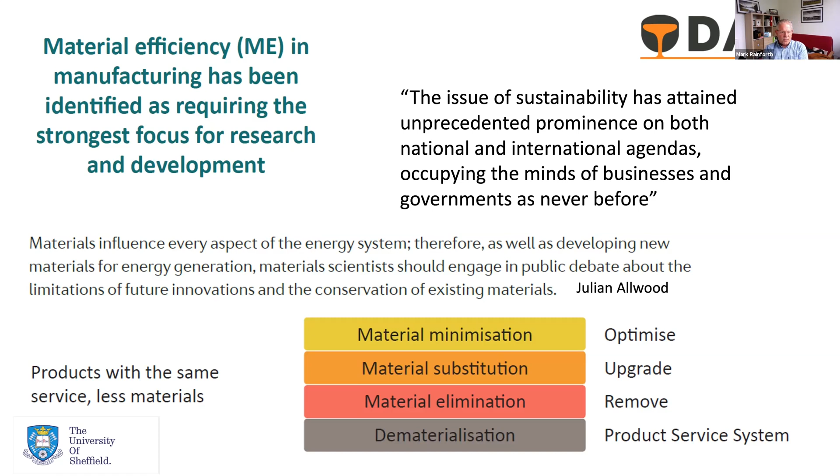And as Julian Allwood stated, materials influence every aspect of the energy system. Therefore, as well as developing new materials for energy generation, we must engage in public debate about limitations of future innovations and conservation of existing materials. So all very good words. And of course, it applies across a very wide range of different sectors, whether it's aerospace, transport, energy generation, etc. It's pretty much a universal issue.

So as Cameron introduced, we will run out of elements. There are many different ways of presenting this data, and some, like aluminium, we have reserves to take us forward a very long time into the future, but others certainly are much more restricted.

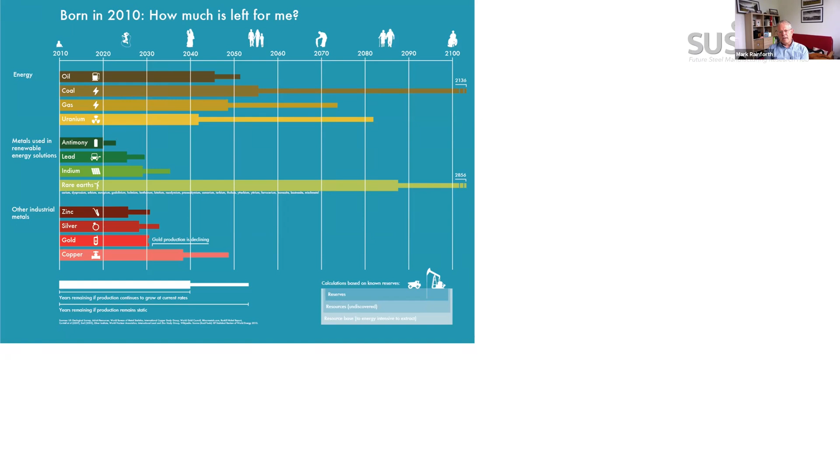But of course, it's not just the issue of how much resource we have. So rare earths have a very long resource availability, but of course that is affected by the location they come from.

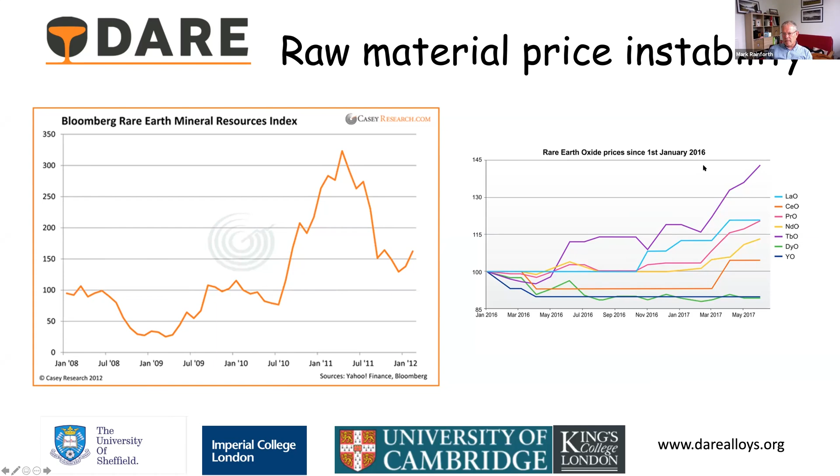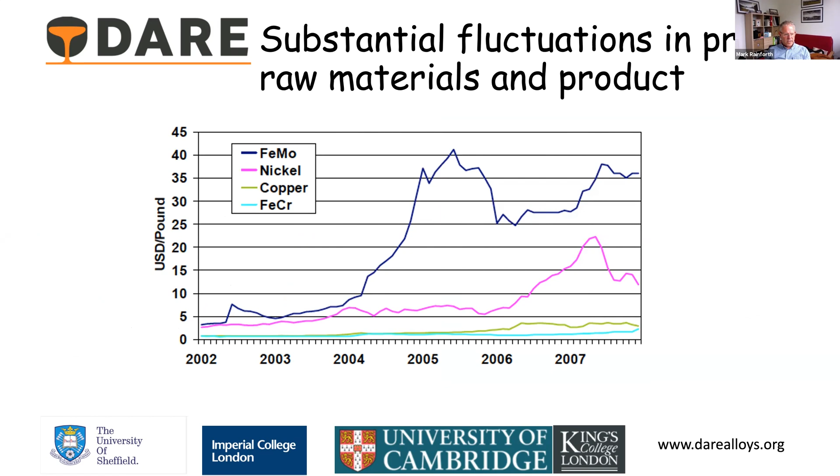Even when looking at the price of raw materials within supply, for example into the steel industry, we can see the price of ferromolybdenum has gone up very significantly since 2002, where on that scale it's gone from around 3 up to around 40. But it's very volatile.

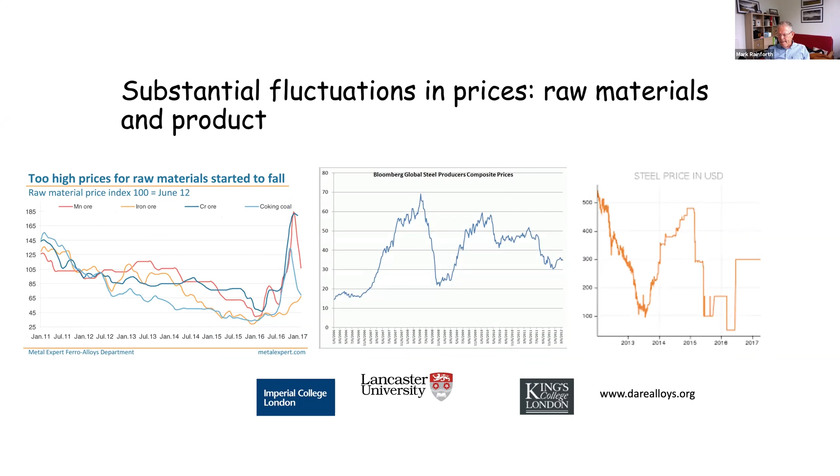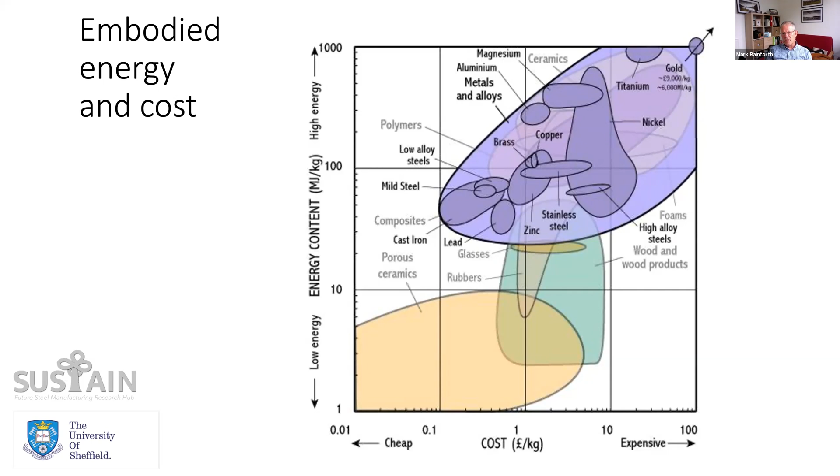So that's just relevant to the steel industry, but it's a similar message across the board. Price fluctuation is a serious issue for us, as well as our limited resource. And that's before we even get to the amount of energy embodied within the materials, and of course the CO2 emissions that come from producing this material. So I won't dwell on that, but it's all pretty scary stuff.

So what I want to do with the talk is go through some specific examples of where we have used this approach to try and reduce the reliance on scarce resource. One has to do these things bearing in mind that when we're going to do this for any particular industrial sector, it usually has to be done at the same price, if not reduced price. So you are looking for improved product performance at the same price or reduced price.

So I'm going to start talking about steel, and we know how much, in this audience, steel underpins UK manufacturing. There's many that don't understand how much steel influences our everyday life, whether it's construction, transport, or just engineered goods, and certainly within the energy sectors.

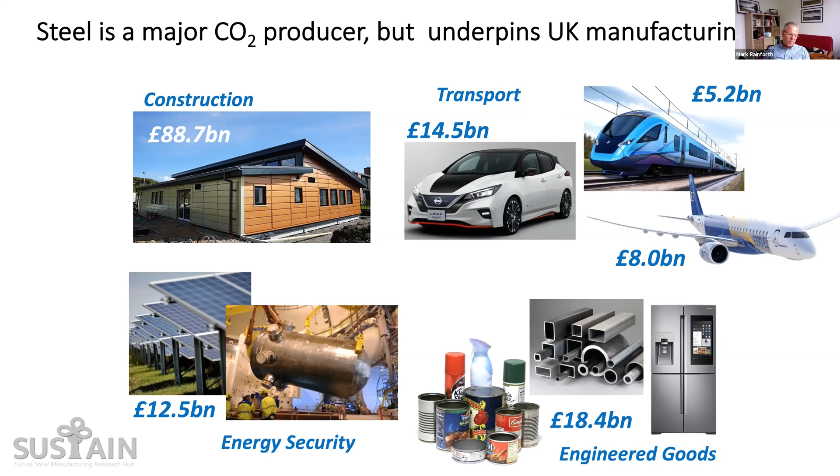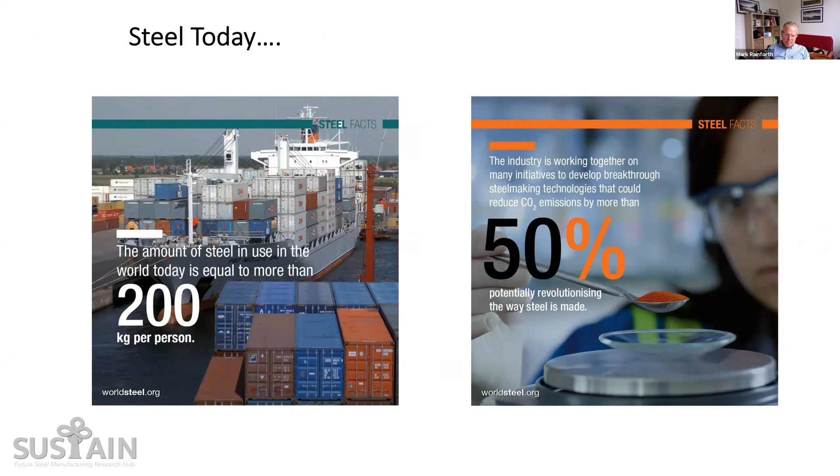And just some statistics, which you may well have heard. I could pluck out many of these, but the amount of steel in use for the world today is equal to more than 200 kilograms per person, which is huge across the whole world. There are many statistics I could give on the importance of steel.

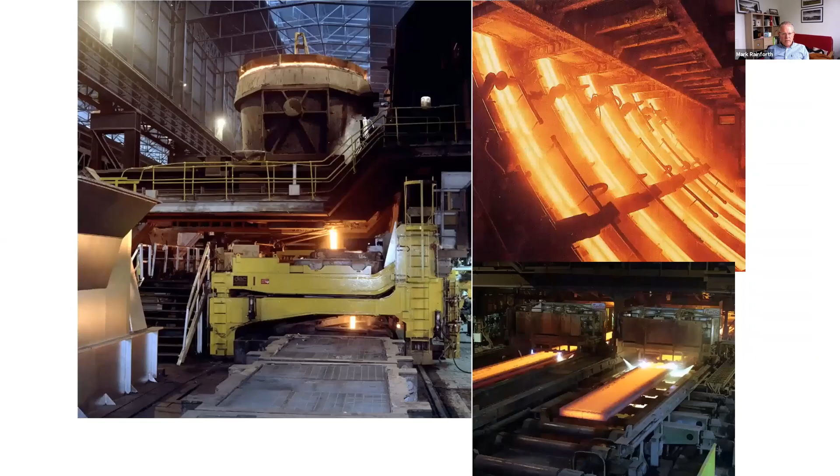I started my career—Cameron said that I went into industry. I started in the steel industry in the Sheffield Rotherham area. This was one of the first continuous casters put in at Templeborough. Very exciting place to work in those days. Of course, now this is what it is today—it's now just a museum and a children's play area, and how things have changed over that period.

So I want to start going through some examples where we have used our approach to designing new alloys, which hopefully in some way adds to this resource efficiency.

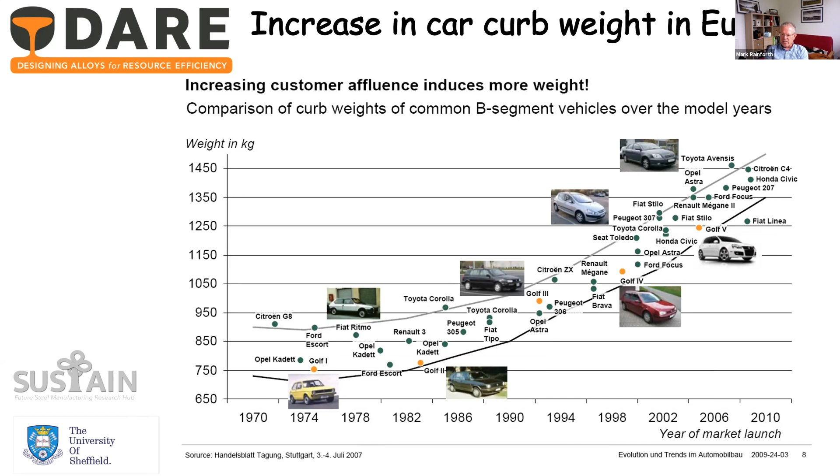So looking first at transport, we all know that the curb weight of cars has gone up substantially. We always like to show this graph. If you look at when I learned to drive, quite a long time ago, the curb weight was typically around 800 kilograms in the late 70s, and now it's pretty much around double that. As more gadgets have been added, you need a motor for everything—to open your boot, wind your windows up, air conditioning, etc. So the curb weight has gone up substantially.

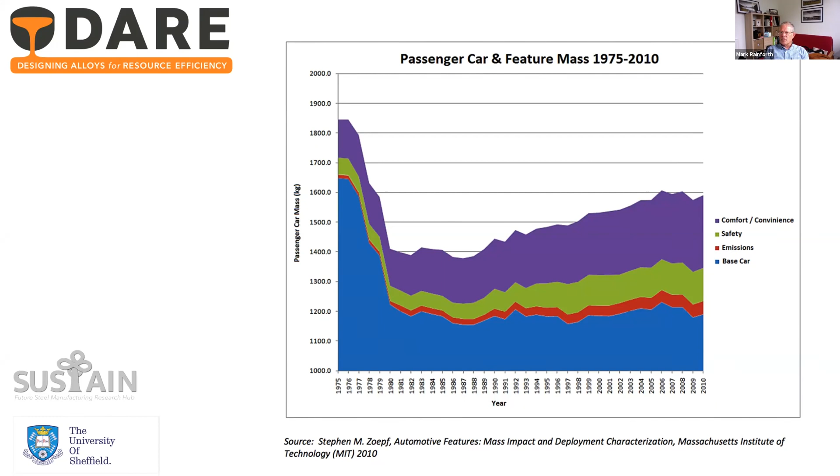This shows it in a slightly different way. We've got the car mass here, and then the contributors to the car's mass, whether it's comfort or convenience, which in purple is the largest one. Safety has been important, and cars are very much safer than they used to be. The base weight has remained roughly constant, which tells us a story, because cars are larger than they used to be, and the base weight has stayed much the same, meaning lighter use of steel. So that illustrates it.

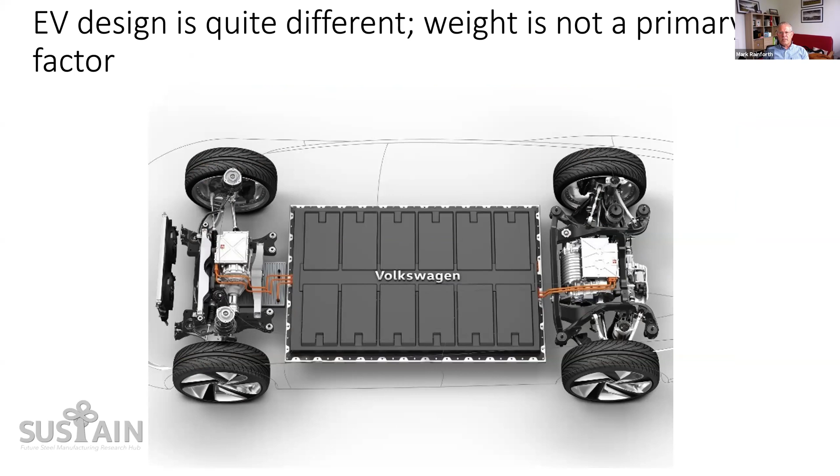Of course, as we move away from internal combustion towards EV and so on, weight issues are different. Weight is not necessarily the primary driver in automotive, but nevertheless it still becomes very important. So there's been a very big drive over the last 15 years or more to develop new advanced high-strength steels. This is a classic banana diagram where we plot the tensile strength of the material against its elongation—just one of the measures we could use for steel performance. But typically, as the strength goes up, the ductility of the material goes down. It's fairly inevitable.

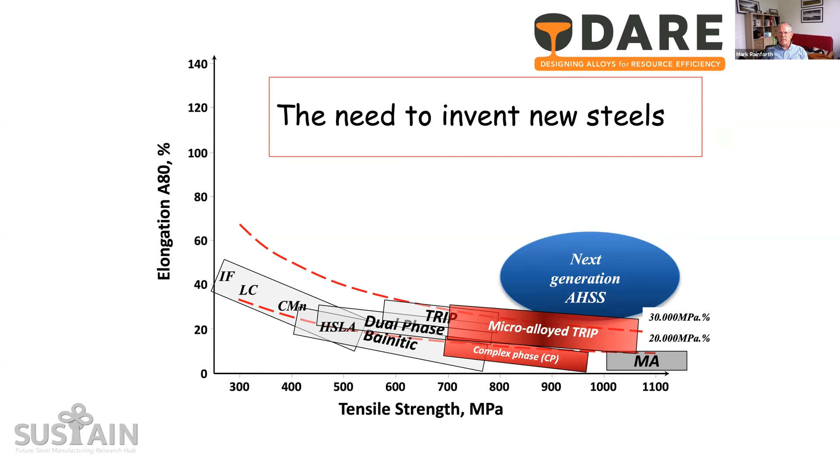There's a lot of different steels within that banana that you can see. But the need to break out of that and develop strength steels that have both high strength and adequate formability and ductility is crucial. So I'm going to describe one project out of two where we were involved.

This is on nanoprecipitation steels, and this was done with Tata Steel. The demand here was to have a high strength steel that could be made on existing plant and in a resource efficient manner. In other words, the cost implications were very clear — it must fit within existing cost.

The drive here was, as you can see, for the application lower control arm and thereabouts in the front chassis. We don't have just tensile ductility, which is often quoted. We need good hole expansion, the stretch flanging. It must have good bending and must be good in fatigue, and we have to do all of those things together and produce the steel.

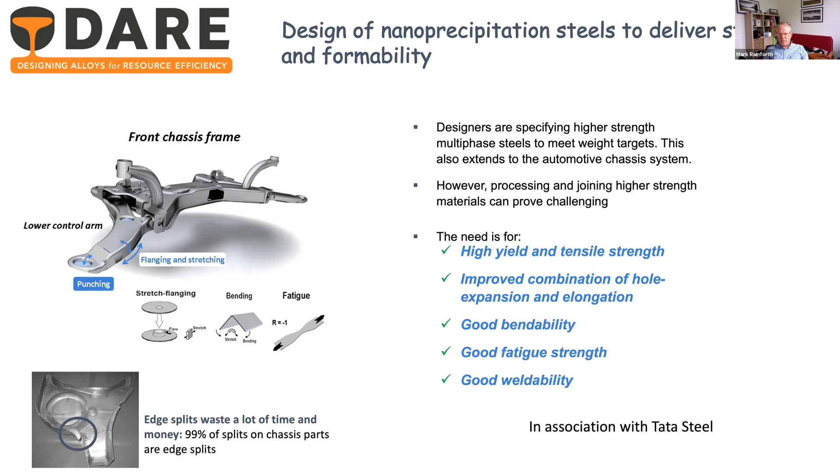So the adoption in the strategy here was to go for a single phase ferrite — in other words, the structure that would give the maximum ductility. This is another version of the hole expansion banana diagram, plotting hole expansion ratio against tensile elongation. Most materials sit in a banana shape, whether dual phase steels, HSLA steels, and so on.

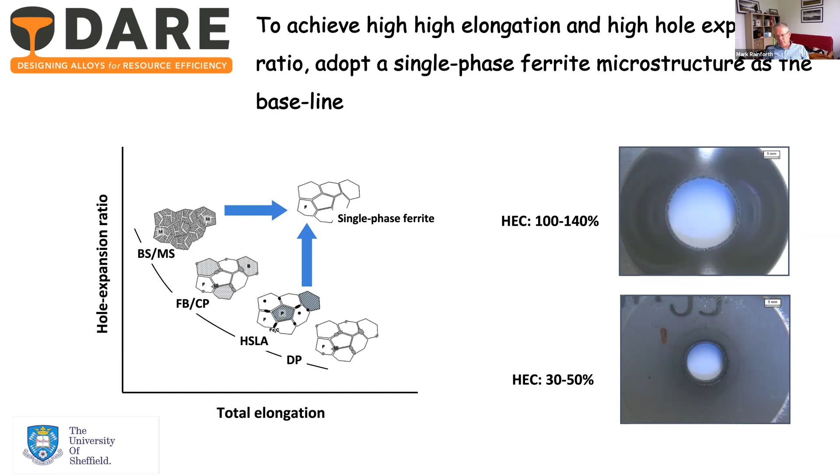So the approach was to go to a ferritic baseline and use the strategies of a fine grain size and a high loading of precipitation to achieve the strengths of up to 1 gigapascal that we were seeking.

As I say, there's lots of good academics that sit in their laboratories developing new materials, but then they can't be scaled up and can't be used in plant, or need major new investment in plant. The remit here was very much to be able to manufacture within the existing plant.

So that involved rolling, with finish of rolling at about 900, and then a rapid cool to the coiling temperature, where it would be held somewhere in the range of 600 to 650 degrees centigrade, at which we'd get transformation into the ferrite. But the key was to achieve this interface precipitation.

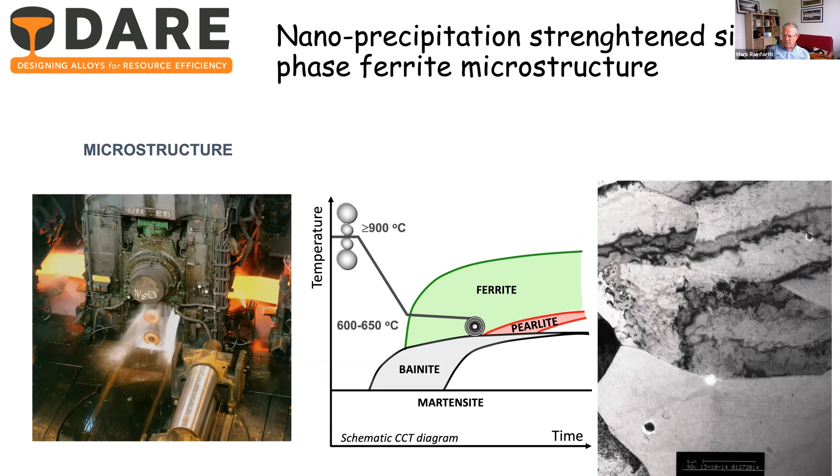So that's the image on the right, which is just showing the ferritic structure in a transmission electron micrograph, and you can just about make out these very fine precipitates that are there.

If we look in more detail, we can see these beautiful rows of precipitates — there's just 3 examples altogether there. And they are typically in the region of 3 to 10 nanometers in size.

Now, this is nothing new. Interface precipitation was studied extensively in the 80s. It was a very popular subject then, but it never really made its way through to a commercial product.

So what we did with this is to play around with the compositions, add a bit of magic dust, and end up with an alloy that was really quite lean. The composition, and therefore the cost, was low, and we could produce a very high number density of very fine precipitates within the structure.

I'm taking a diagram here that's been around for a long time in terms of the mechanism of the austenite-ferrite transformation producing precipitation in the process, which of course is still a matter of debate, but it's been known for a long time.

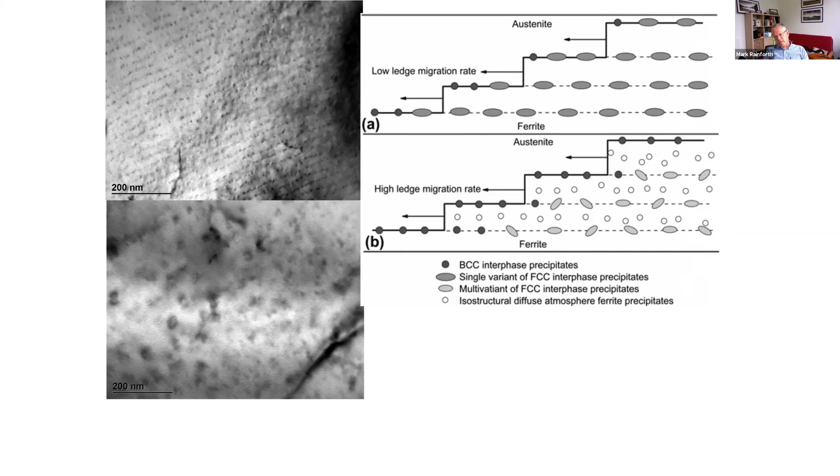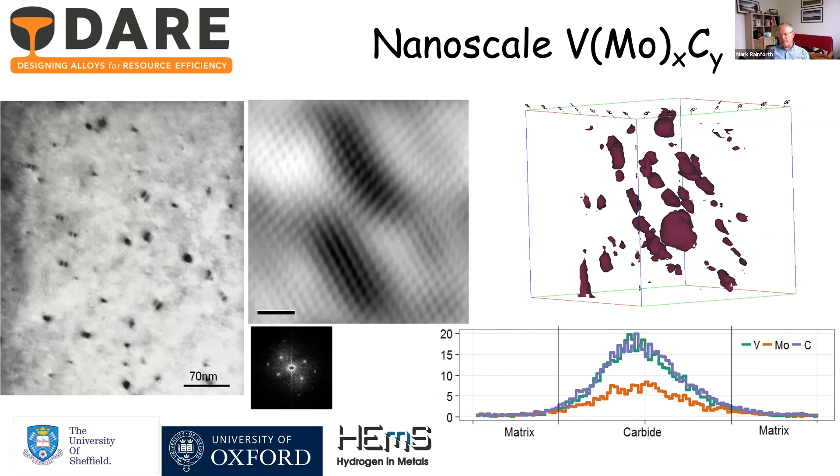And then on the right-hand side we have the atom probe, showing lines of precipitates, in this case vanadium carbides with a tiny bit of molybdenum, which is a crucial addition in there, which refines the structure and gives us this really high number density.

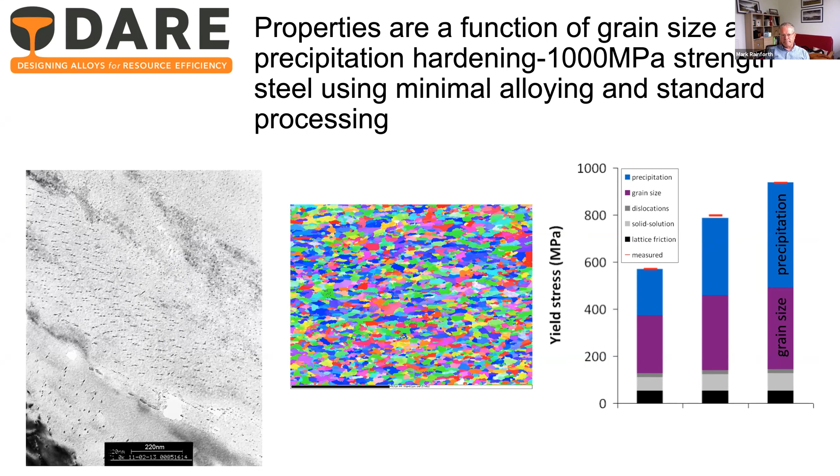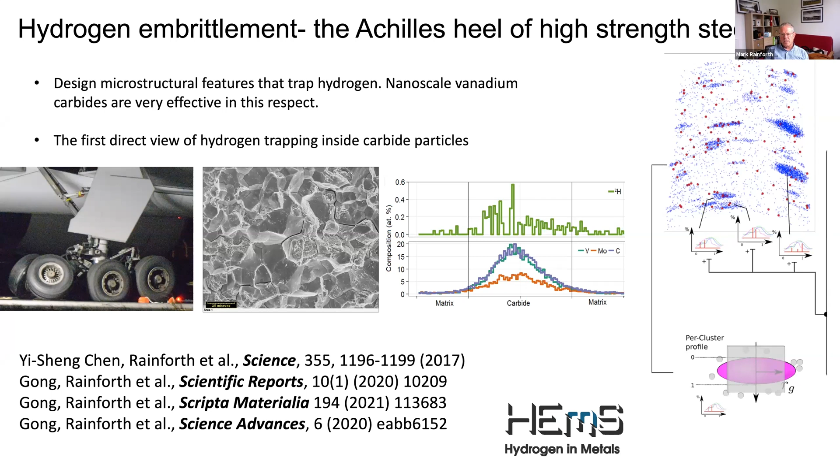Now the good thing about the steel we developed is that vanadium carbides, particularly the very fine coherent ones, are very good at trapping hydrogen. So if you do get hydrogen ingress into the material, particularly the semi-coherent, slightly larger precipitates are very efficient at trapping it. The deficit in strength from hydrogen embrittlement is far, far less than with some competitor materials such as dual phase steels, where the deficit can be much larger.

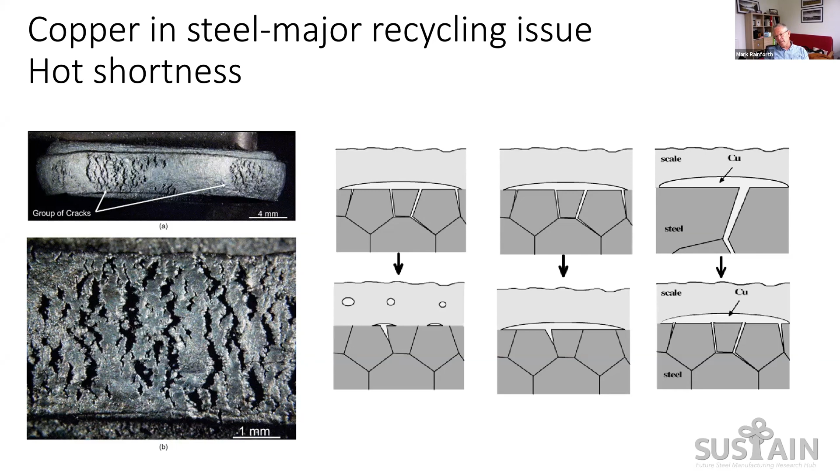But we had some thoughts about this - could we be more tolerant of copper in steel? Is there a way of developing steels that are? There are already steel grades used which have higher copper content. There's A707, a forging steel used for example in tension legs on oil platforms, which is a very high strength copper-bearing steel. Another example is 17-4 precipitation hardened stainless steel grades, which again have 3 or 4% copper. But these are really very specialized steels, not for wider use.

So we had a project to think laterally about whether we could develop a steel that could be made relatively straightforwardly, that could deliver on our challenges of having high strength, be made on existing plant, be processable, and at least the same cost, if not reduced cost.

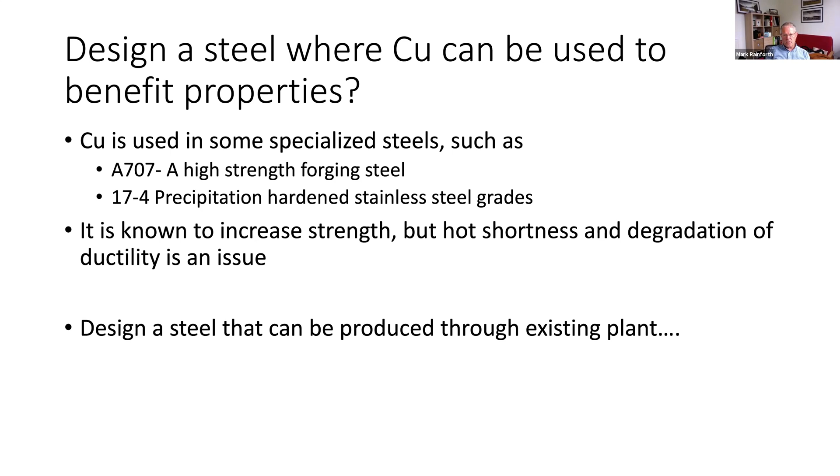I don't have time to go through the rather interesting story of how we got there, but we started by taking a baseline of an iron-manganese steel, and we started putting in copper in amounts of 1, 2, 3, up to 4%, expecting the thing would just fall apart and it would all be a nightmare. But in fact we found some very interesting properties.

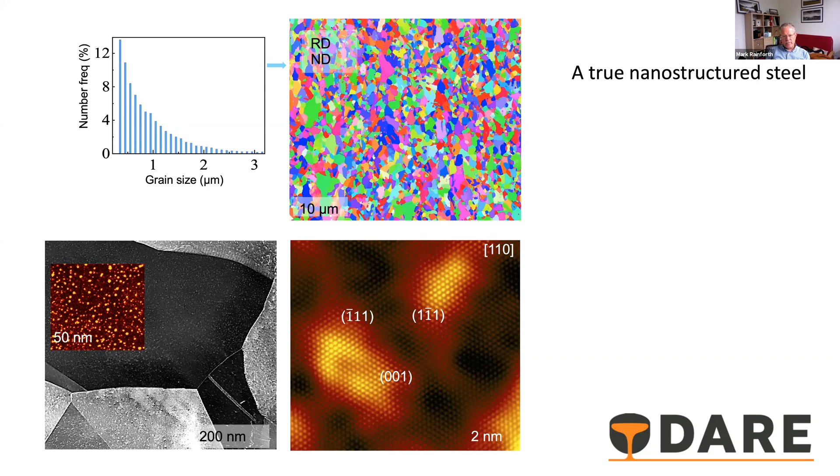Now during that flash anneal, what we do is precipitate a very high number density of copper precipitates. The bottom left shows the distribution of the very fine copper precipitate, showing up as bright blobs. In the middle bottom, that's an atomic image showing the interface between the iron matrix, which is FCC in this case and still has some copper in it but is predominantly iron-manganese, and these precipitate regions which are copper rich but also contain iron. We have perfect coherency between them, and as you can see they're really very fine, in the 2-3 nanometer range.

Just to quantify that a bit more, there is the atom probe data from this material. On the left you can see the atom probe tip, giving an idea of the very high number density of copper precipitates within the structure, which are, as I say, perfectly coherent.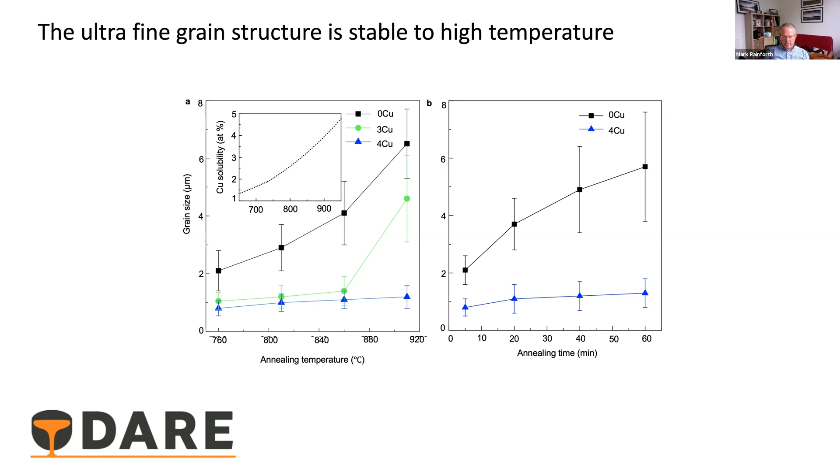Looking at the mechanical properties, we've achieved something quite interesting as well as impressive. The yield strength with the 4% copper alloy is typically about 700 megapascals, which is pretty respectable, not outstanding. But the difficulty is getting both a high yield strength and good work hardening behavior so that you get a stable and large ductility. You can see sustained linear work hardening up to a true strain of about 0.45, giving massive ductility, taking the material strength up to just shy of 2 gigapascals.

One might ask how you manage to get such high ductility in an alloy that's basically precipitation hardened, because in all precipitation hardened steels, like the previous example, you do not get this high ductility. What we believe is that the copper precipitates are not actually giving strengthening per se - you just get shearing of dislocations, which seem to go through the precipitates uninhibited. What the copper is doing is stabilizing that very fine grain size of 1 micron or thereabouts, and the deformation mechanisms are in fact through a twinning mechanism, which is quite different.

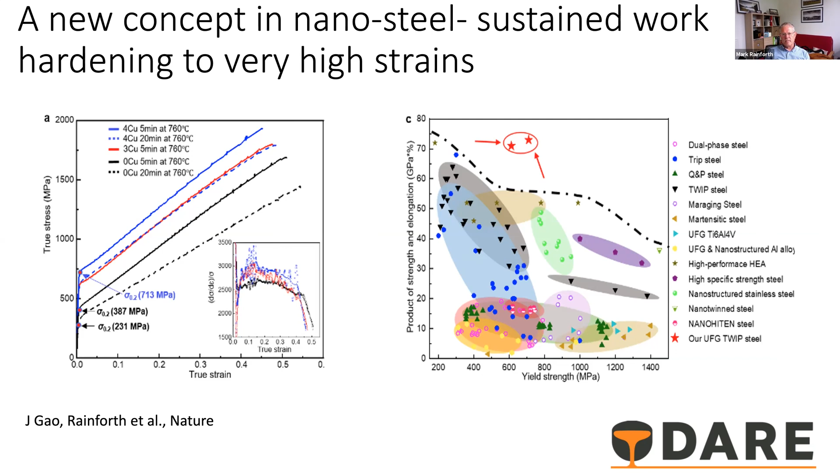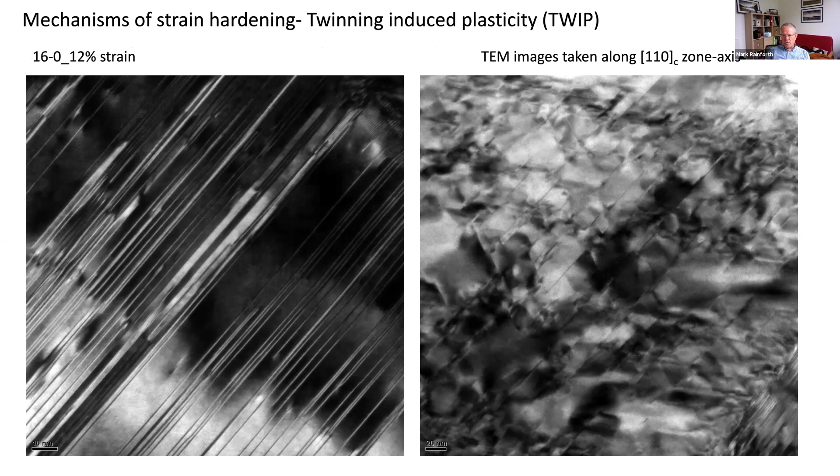Just to show you some beautiful images, this is the TWIP, or twinning induced plasticity, taking place during deformation - you can see these beautiful twins. When you go to high resolution imaging, you can indeed see there is some transformation to hexagonal phase as well. So we get both a TRIP and a TWIP effect, and that is what is responsible for getting this very high ductility.

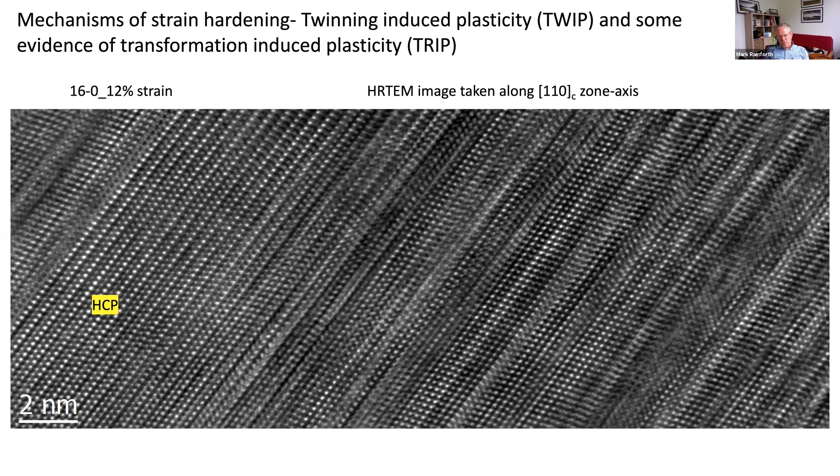Okay, so that's steels. Now for something completely different, I'll move on to magnesium alloys relatively briefly. Magnesium is around quite extensively as cast alloys, but wrought magnesium alloys are far less used. One reason is they tend to be quite expensive. A second reason is also that they rely on rare earth elements, because otherwise we will not get adequate formability.

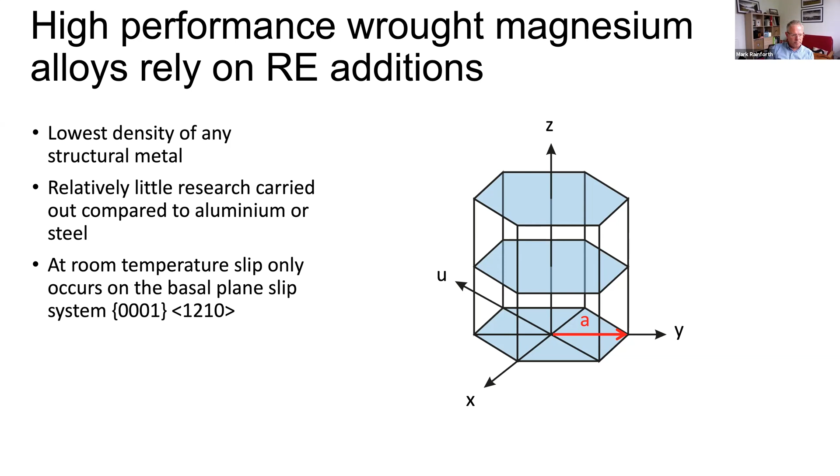I'll just skip that, I think. So again, it's something that's not new - we seem to be reinventing science we've done before. Magnesium has been around quite a while, if you could afford to put it in. There's a Jaguar Mark 7 that made very extensive use of magnesium for lightweighting. Porsche used it too, and there's a future predicted car from Volkswagen. But the Achilles heel really is the cost, which comes back to this reliance on rare earth elements in order to allow sufficient formability in the alloy. So the wrought alloys tend to use these rare earths - typically magnesium, yttrium, gadolinium as an example.

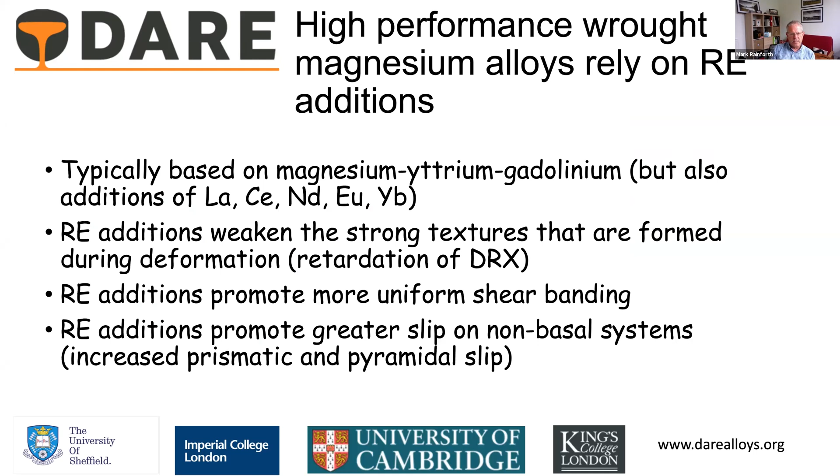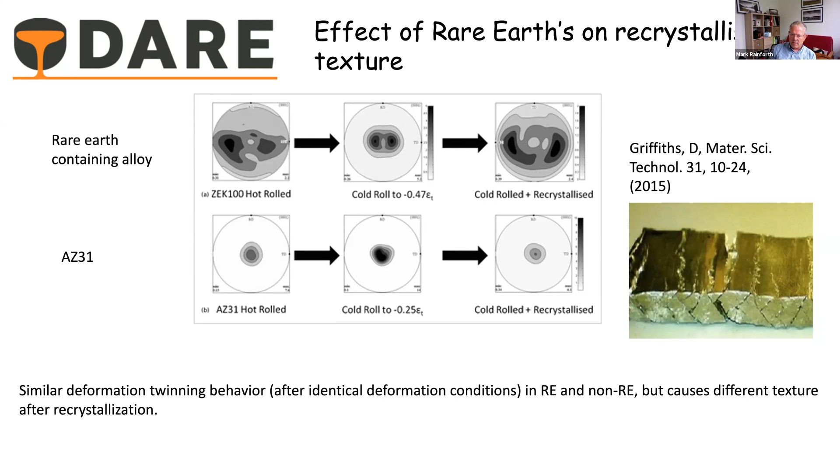And it all comes down to the crystallographic texture. If you have a standard magnesium alloy, it has a very strong crystallographic texture where the basal planes become all aligned, as you can see in the bottom series, showing a very strong texture with the basal plane pointing vertically upwards. The consequence is that when you form these alloys, you get extensive cracking, as shown in the right-hand image. We've known for a long time that if we put rare earth elements in, we distribute this texture, it becomes much weaker, and the crystallographic texture is distributed over a much wider range.

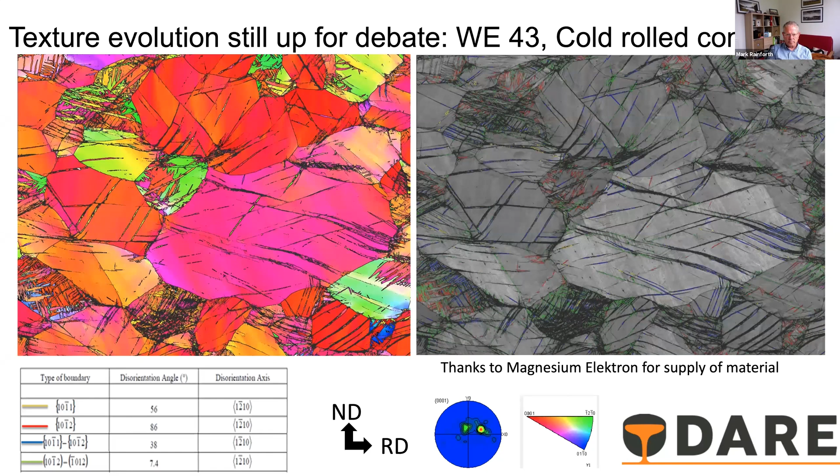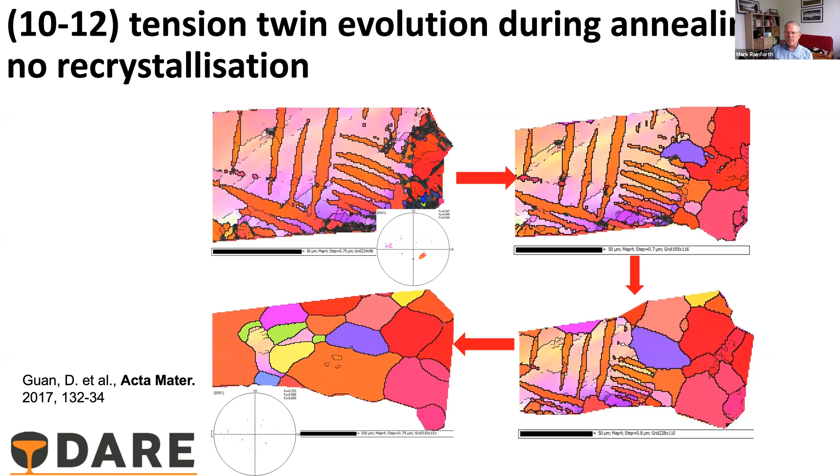I had this wonderful postdoc, Dikai, who would happily sit there and take the same part of the microstructure, deform it, prepare a region, then characterize it, then deform it again or recrystallize it again, depending on what he was doing, finding exactly the same area and following this process through. So you've got four images there showing a progression, in this case, of recrystallization. On the top left, you've got the twins, and in this particular case for tension twins, recrystallization comes along and consumes all the structure. You can see it growing from the right-hand side, coming across to the left, and in the bottom left image, it's consumed the whole structure.

And that gives you the very strong basal texture that we're familiar with. On the other hand, in double twin variants, it's quite different - recrystallization occurs within the twins. As these grow, they tend to give this distributed texture, which is what we want - in other words, not a strong texture.

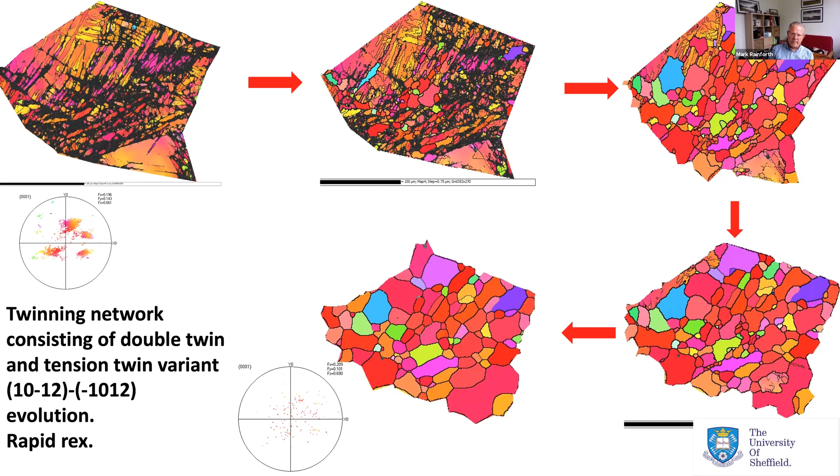So the question here is, are there other additions that we can put in that would do the same as the rare earth additions? There's been a lot of interest, and POSCO have led on this in producing magnesium, calcium, zinc alloys, where calcium seems to behave very much in the way that the rare earth elements do. To cut a long story short, this is quite a lean alloy, so magnesium with a small amount of calcium, small amount of zinc in. We now get a very uniform grain size within the material.

As you can see on the right-hand side, the texture is nicely distributed, and it's a very weak texture. So we know that this alloy is very formable, and we know it also has adequate corrosion resistance, which is really going to be important, although protection is well advanced for these alloys. So manufacturers such as Volkswagen have been looking at these magnesium alloys as possible commercially viable routes.

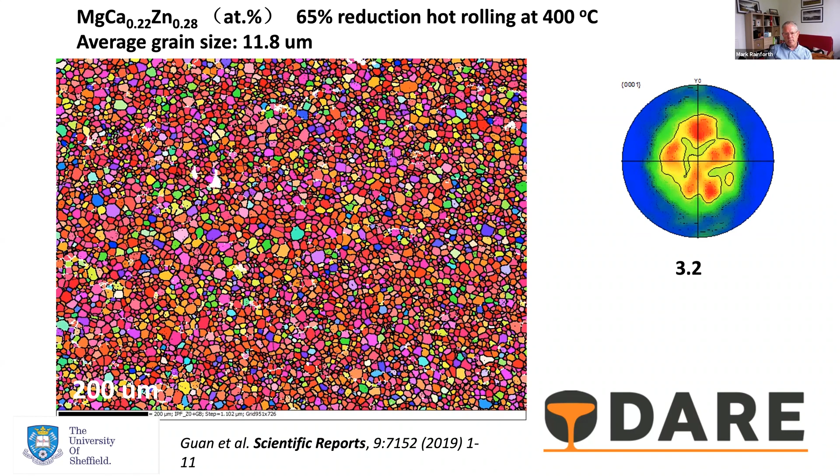And the trick here is the calcium. It's a large atom relative to the magnesium. It segregates the boundaries, but it does play pretty much exactly the same role as the rare earth elements do in terms of forming that crystallographic texture.

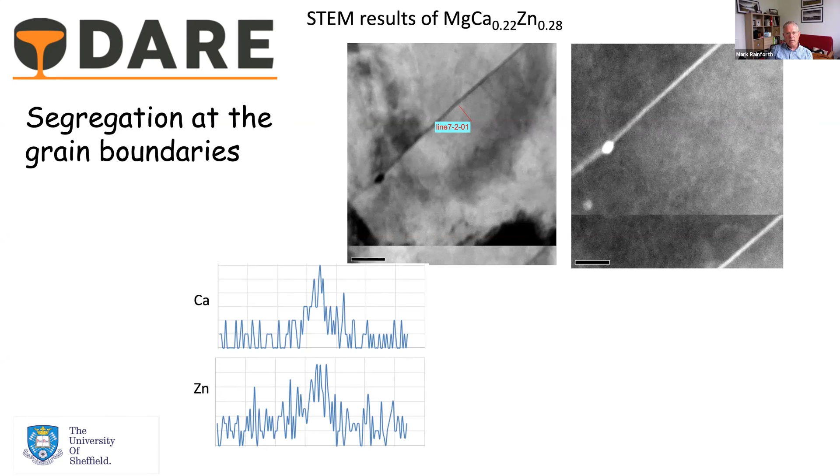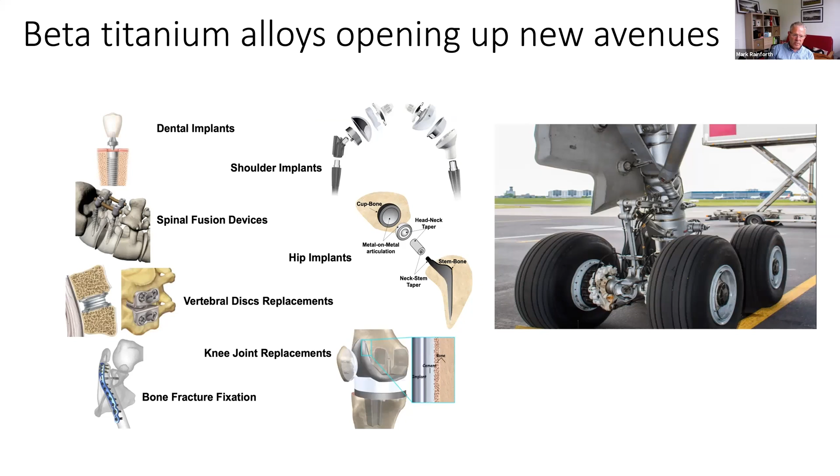Last but not least, I'm going to go through this relatively quickly, but I just wanted to mention titanium alloys as well, where there is a lot of interest in the beta titanium alloys for applications such as undercarriages, where really it's strength, but they also have much lower stiffness, and so there's much interest in biomedical applications. Now, much of these alloys have been developed on the basis of what's called bond order, d orbital energy level graphs.

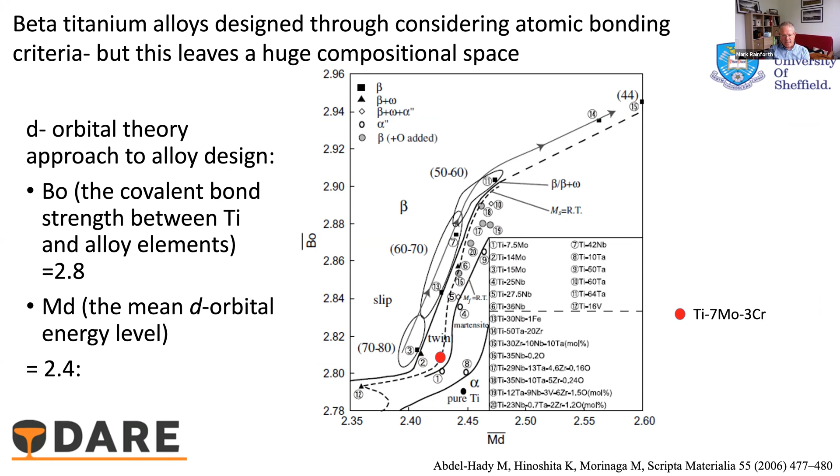So we plot these two variables, and that's just a plot there of all the different alloy additions that have been made. You can get yourself another paper by putting yet another alloy composition within there. But again, it's a very similar story to the steel. The parallels are very similar in terms of developing an alloy that can offer you both high yield strength, high work hardening, so that we get the good mechanical properties, but equally that has additions that are quite straightforward, like iron, chromium, and so on.

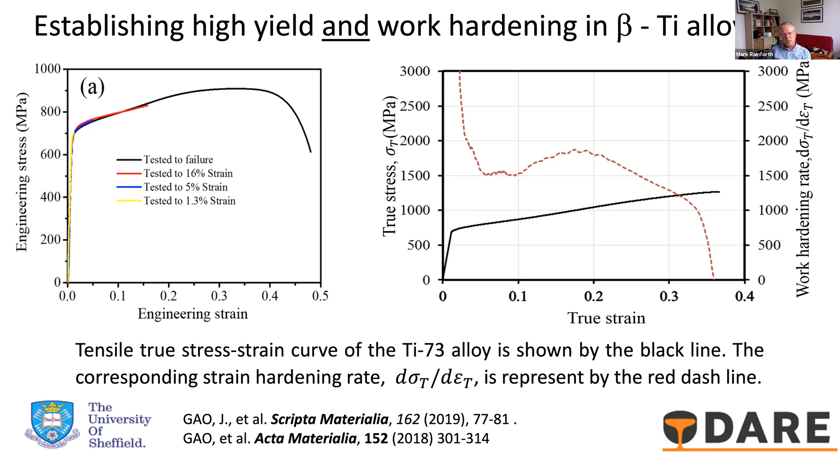So this is one alloy where we have achieved that. We've got a yield strength of 700 megapascals, which is high for a beta titanium alloy, and also nice uniform work hardening that takes us to a true strain of 0.4, which again is very substantial. As I say, the parallels with the steel are very similar - we're using this transformation-induced plasticity and twinning-induced plasticity together. So if we get both of those mechanisms taking place, then we can generate these very high strengths.

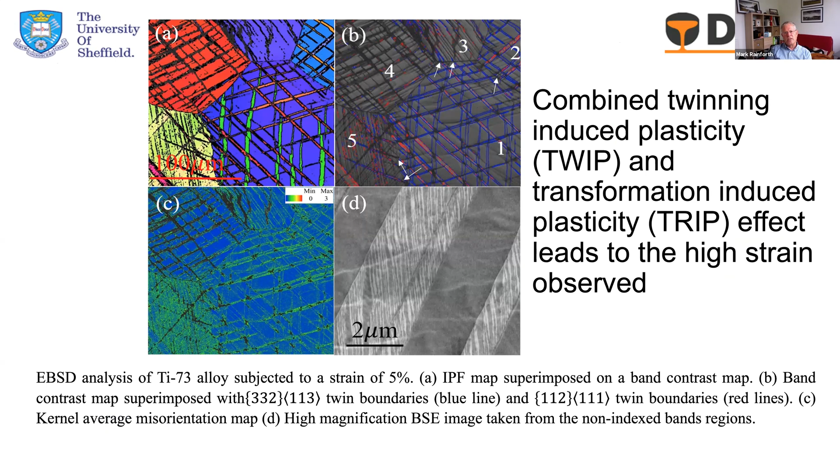And I just can't resist showing some nice images of those two mechanisms taking place - you get these very beautiful microstructures.

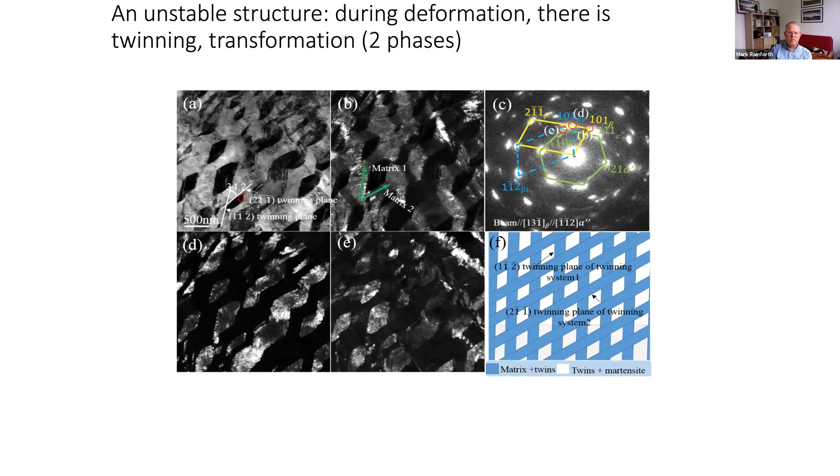I think the take-home message there is there are some interesting parallels between different metal systems, where we can use the same basic mechanisms to strengthen the alloy.

Okay, I think my time is up. So I think the take-home messages are: there is a lot of scope for still designing new metal alloys, but doing that in a resource-efficient way, looking at that as a key determinant of design. And we can still produce something with high performance and no cost implication. Okay, that's it, I've come to the end. So I guess I should stop sharing the screen.

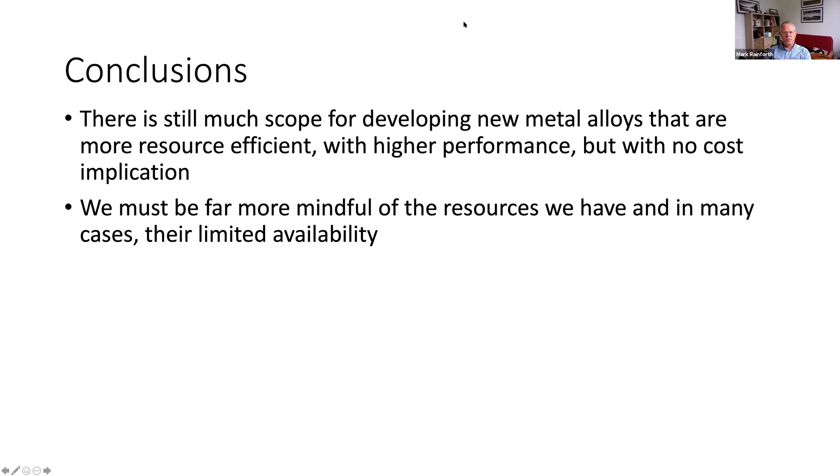Thanks very much, Mark. And some virtual applause, I'm sure. Yeah, I can hear it ringing in my ears.